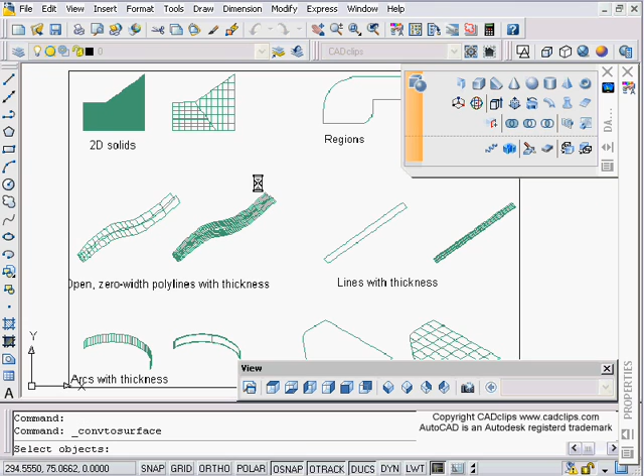3D stuff we're talking about, and in this particular lesson we're talking about, over on the dashboard here, convert to surface. So what you can do then is you're creating surfaces from various objects. So I'm going to start by clicking on that command. I'm going to hit my good old F1 command, which brings up my help menu, and I'm going to have a look at this, and this command F1 bumps you straight into the help for that particular command if it's been activated, and it converts objects to surfaces.

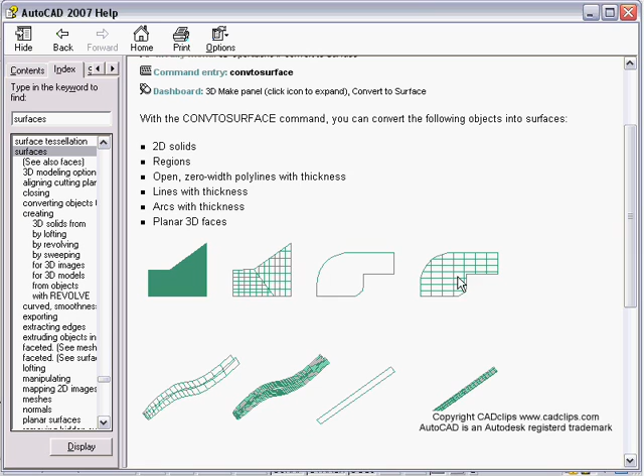Basically, it converts objects to surfaces, and the process is here, and you can see that you can create a surface from a 2D solid. So this is a 2D solid, and this gets converted to a surface. This is a region, and this is the resultant surface. This is a splined, or it looks like a fit curved polyline with a zero width but a thickness, a height type thing, and then it creates a surface from that.

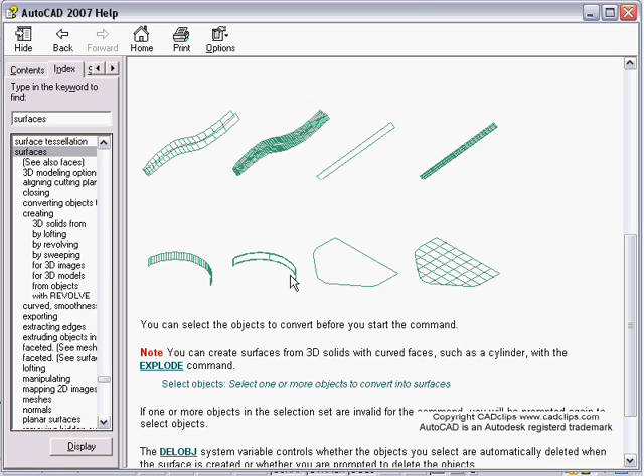This is a line with thickness, and the resultant is that surface. This is an arc with thickness, and it creates that surface, and this is a 3D face, and it creates a surface. So here we have these: surface, surface, surface, and the objects start from over here. Okay, so we'll just go back to our screen. I've just done a bit of a screen capture on that, and I'm going to do these one at a time just to kind of go through them.

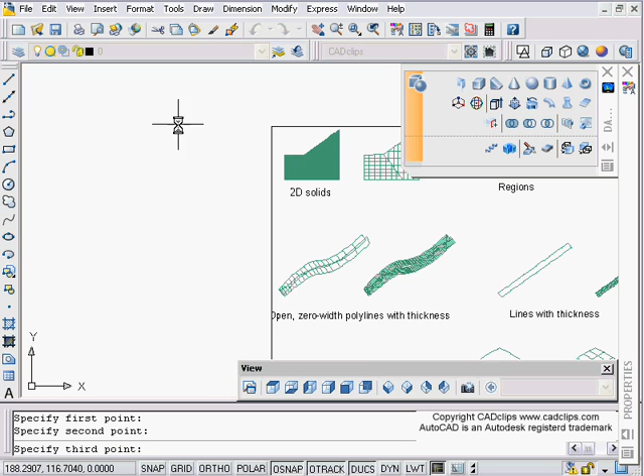So first thing I'm going to create is a 2D solid, and that command, believe it or not, is SOLID, and you have to kind of make a bow tie type shape, and I'm not going to get into that, but I'm going to click 1, read my command line, second point, third point, fourth point, and then I can continue by going third point, fourth point, third point, fourth point. Okay, I'm going to erase these, they're individual. So if I list it, it is a solid, but it's a 2D solid. I might be able to push, pull, or extrude it, however.

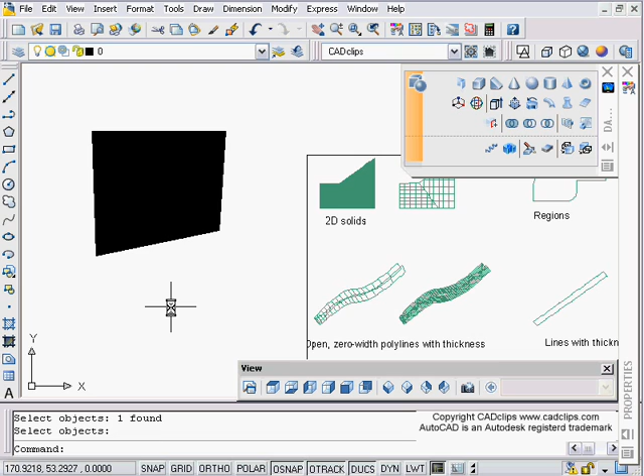So what I'm going to do now is go down here, convert to surface, pick on my 2D solid, enter, and it's done. Then I'm going to take this thing and move that over. That was the new surface. If I go to a 3D view, okay, I can't see that. That's my original.

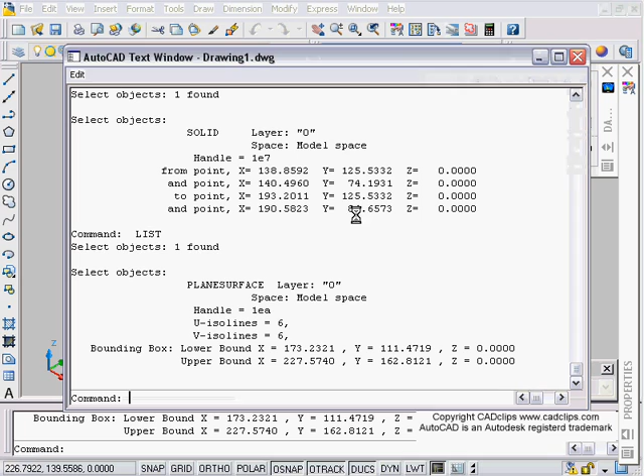And then if I go to my conceptual view, if I list this, that's a solid. It's a 2D solid because the Z's are 0. And if I list this, this is a planar surface. So it converted that 2D solid to a surface. Basically, that's all it did. Okay, I'm going to go back to my wireframe so I can read my notes.

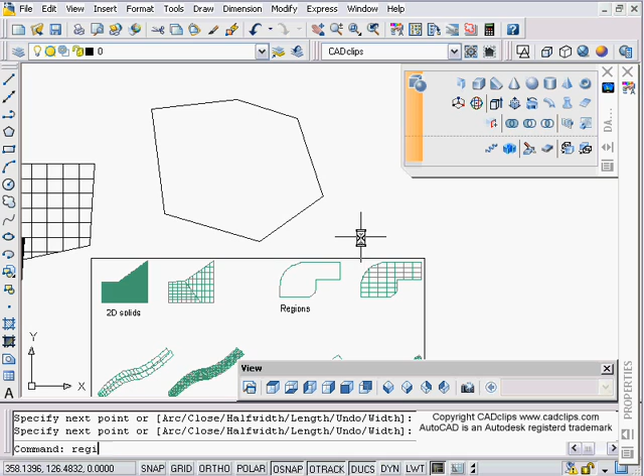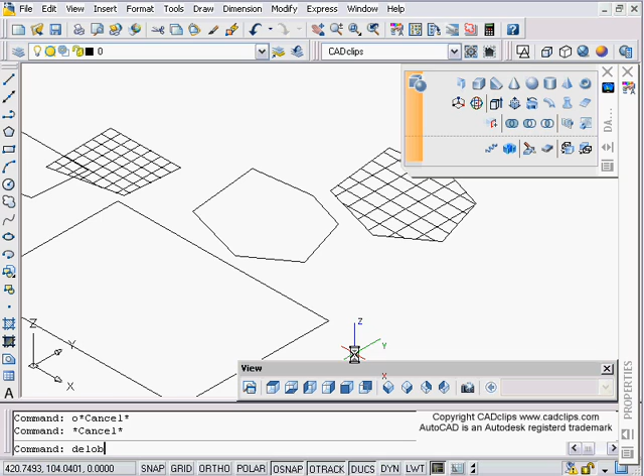A region. I'm going to draw a polyline. I'm going to click around, doesn't matter, C for close. I'm going to type REGION, select this object, and turn it into a region. If I list this, it tells me it's a region. We can learn more about regions as well, but I'm going to go back to my 3D view, use my convert to surface, pick on the region, enter, and I'm done. Move that over, and remember our DELOBJ setting of 0 means don't delete the original object. So there's our two new surfaces created from a 2D solid and a region.

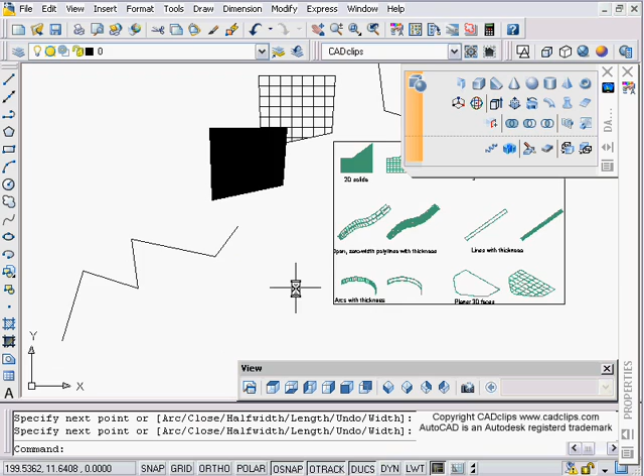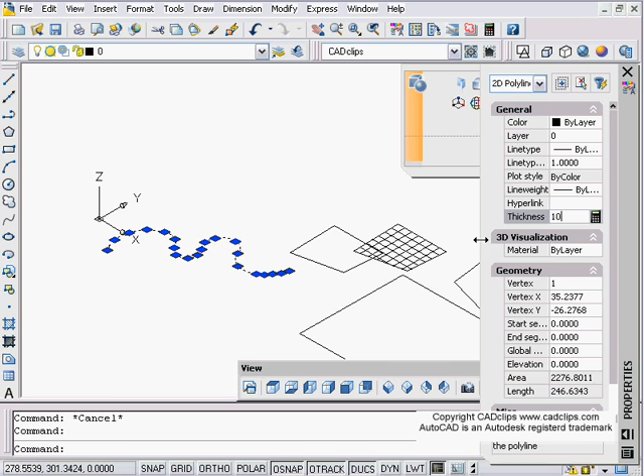Working our way through. An open 0 width polyline with a thickness. So let's draw a polyline here. It's open, it has a width of 0. Remember, width gives it kind of a 2D width, and I'm going to say PE for polyline edit, pick on it, F for fit curve, and hit enter. I'm going to go to a 3D view, convert to surface, pick on here. Oh, I need to give it a thickness. Sorry, I'm going to give this a thickness of 10. Polyline, fit curve, thickness.

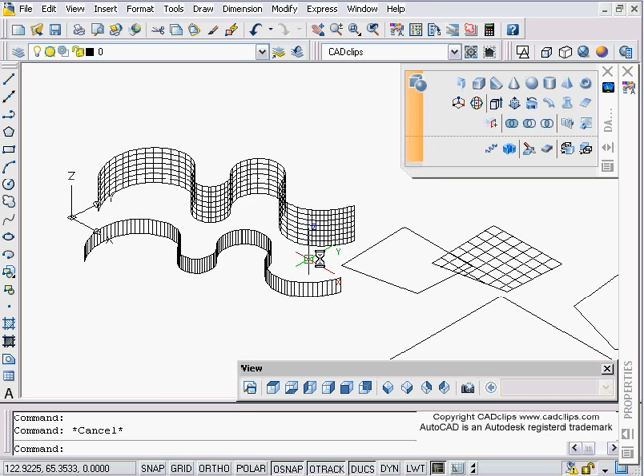Now I'm going to go to convert to surface, pick on here, enter, and it's done. Move, L for last. There's the surface I created, and it has surface properties, etc., created from an open polyline with a thickness. Back to here. We can talk about just a line. I'm not even going to do the line example because it's exactly the same as this, except we use just a regular old line. Arc is the same thing.

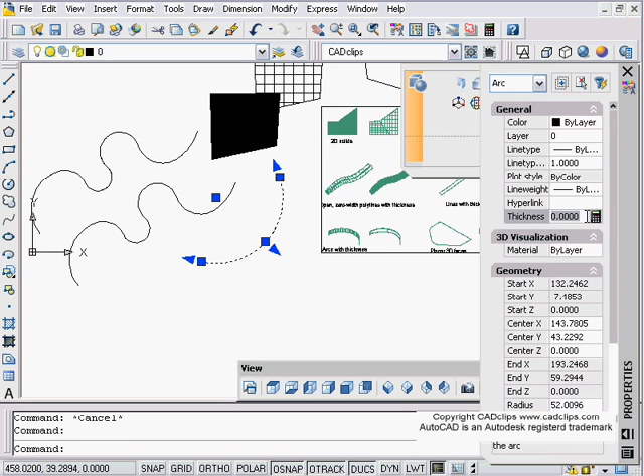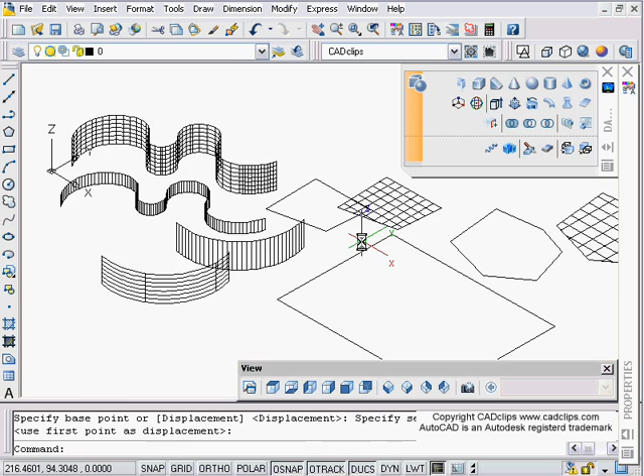I can say A for arc, draw an arc. I can take that arc and give it a thickness of 25, hit enter, go to my 3D view, convert to surface this, enter, and then M for move, L for last. There I've got another surface. You can read up some more on the usefulness of surfaces, and really the new tools you can use to create your 3D models. We're using a combination of primitives and surfaces, etc., and even objects with thickness.

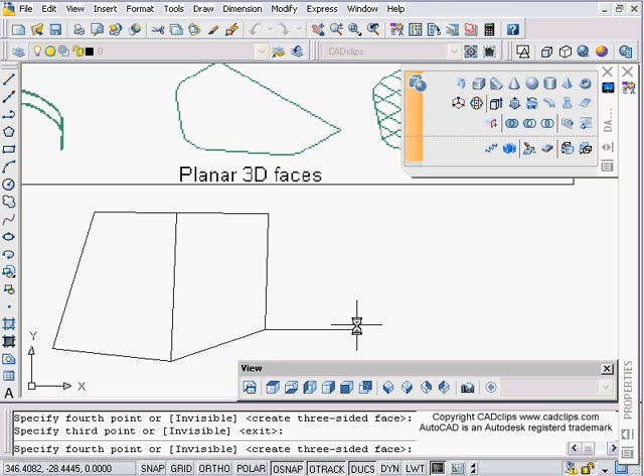Let's go back to our top view. Lastly, we're going to deal with the 3D face. So we need to draw some 3D faces, just another object type, an object we used a lot more in the past. I'm just going to type in 3DFACE, and pick 1, 2, there's only 4 corners on a 3D face, click here and there. Now I'm going to take my ortho off, pick over here and over here, and over here. These can be in 3D, of course. These are laying down flat. These are all different faces, and I only really need one. Maybe I can do more than one at a time.

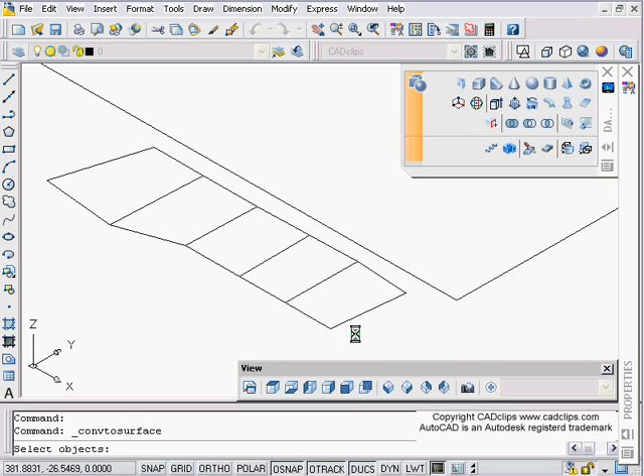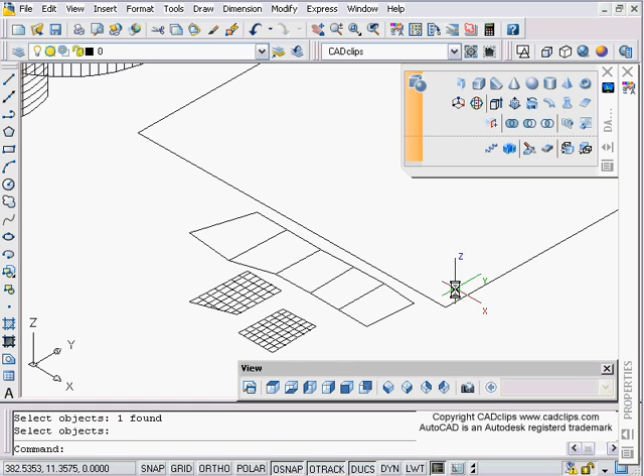Let's try that. Let's go to my 3D view. There's my new 3D faces. I'm going to say convert to surface, enter, and it creates them all. And then I can move those off as individual surfaces created from my original 3D faces. So you can do more than one at a time. I would experiment a little bit more with that, but nothing complicated. Back to my top view.

So creating 3D faces and converting 2D solids, regions, polylines with thickness, lines with thickness, arcs with thickness, and 3D faces, converting those all to be the new surface objects.